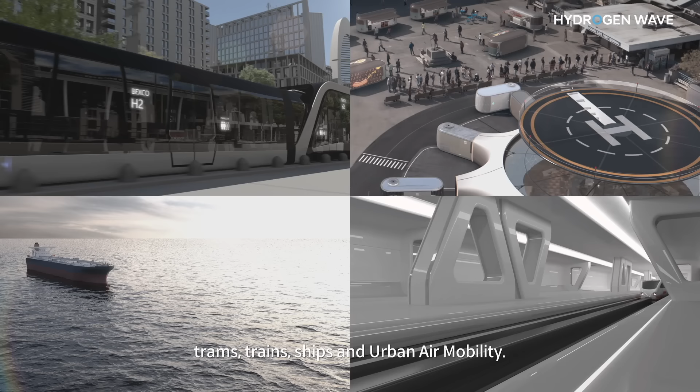Then, what does Hyundai Motor Group's vision for future hydrogen society look like? Our vision covers not only passenger and commercial vehicles, but also various types of transportation, such as trams, trains, ships, and urban air mobility. Our vision is to apply hydrogen energy in all areas of life and industry, such as our homes, workplaces, and factories.

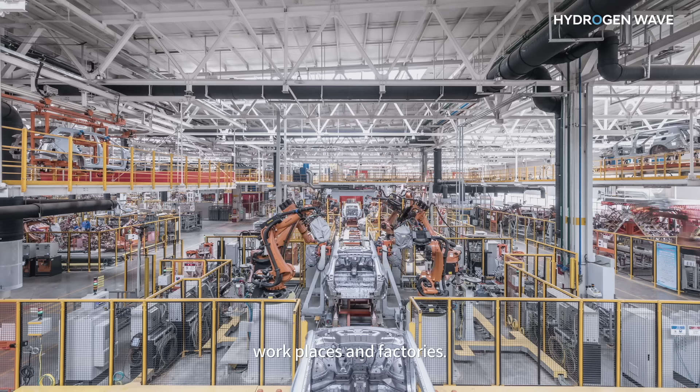The goal is to make hydrogen readily used for everyone, everything, and everywhere. With this breakthrough, we aim to help foster a worldwide hydrogen society by 2040. In particular, we will proactively respond to climate change through our hydrogen solutions, starting with the commercial vehicles sector, which emits relatively large amounts of CO2.

Going forward, Hyundai Motor Group will launch all our new commercial vehicles, such as buses and heavy-duty trucks, as hydrogen EVs and battery EVs in the global market. By 2028, we plan to become the first global automaker to apply fuel cell systems to all commercial vehicle models.

Using these hydrogen commercial vehicles, we will promote the complete transition of Korea's public transportation and logistics systems to hydrogen-based solutions. This will be a good model to follow for countries around the world. To achieve this, we are planning to introduce a new fuel cell system in the near future at a reduced price and volume with significantly improved durability and output.

We are confident that with our vision and technological innovation, there will be great changes in human life comparable to the Industrial Revolution and Digital Revolution.

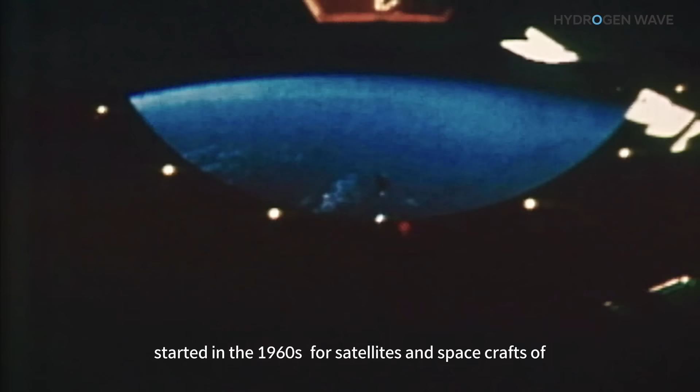When did the hydrogen fuel cell start its career? The first remarkable application of hydrogen fuel cells started in the 1960s for satellites and spacecraft of the Gemini and Apollo programs. We expected that bringing hydrogen fuel cells to the public would not be easy.

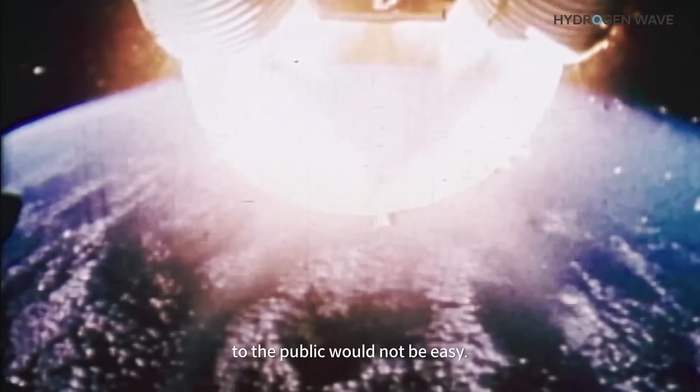Nonetheless, Hyundai Motor Group anticipated the future potential of hydrogen fuel cell at an early stage. In 1998, Hyundai started to develop a hydrogen fuel cell car and has made continuous efforts to make significant progress to the present day. In February 2013, Tucson FCEV was released for the first time in the world, opening the door to the mass production of fuel cell EVs.

Then, in 2018, Hyundai released the next generation hydrogen fuel cell SUV, Nexo. Our Nexo is ranked as the FCEV with the most sales worldwide. But we didn't stop there. We plan to use our fuel cell EVs in various fields.

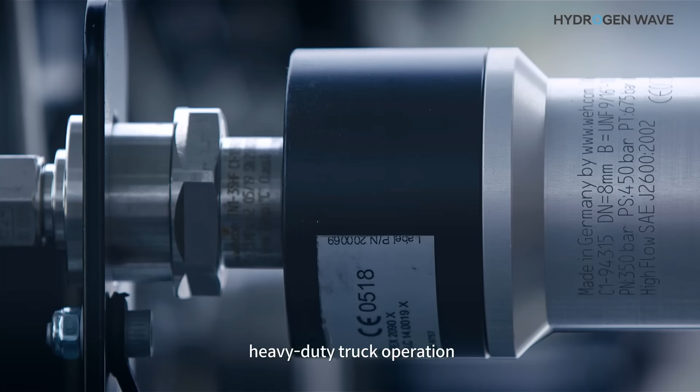First is the key to logistics: trucks. The big challenges in long-haul, zero-emission, heavy-duty truck operation is refueling time and range. The zero-emission powertrain of our Xcient fuel cell truck consists of two Nexo fuel cell systems, a hybrid high-voltage battery for energy recuperation, and a powerful electric motor.

Our Hyundai Xcient fuel cell truck is the first mass-produced heavy-duty fuel cell truck in the world and started operating in Switzerland last summer.

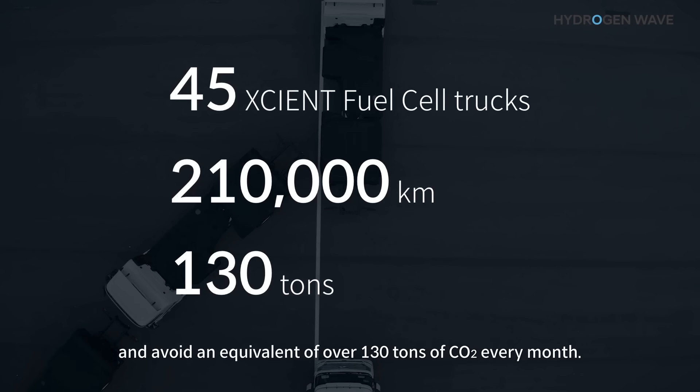Our fleet keeps growing, and we currently have 45 Xcient fuel cell trucks on the road. They cover over 210,000 kilometers of zero-emission operations each month and avoid an equivalent of over 130 tons of CO2 every month. We are remotely monitoring each of our Xcient fuel cell trucks like a Le Mans race car, using our latest smart vehicle monitoring technology.

And so far, my engineers are very satisfied with the performance, the efficiency, and reliability. From the start, Xcient has also met customer expectations, even in challenging aspects such as refueling time and range. Let's hear from the logistics company and the driver in Switzerland about their experience with the Xcient fuel cell truck.

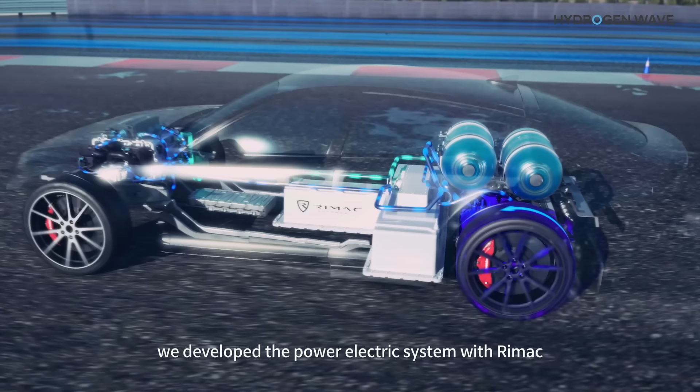So we decided to collaborate with Rimac Automobili, in which Hyundai Motor Group invested in 2019. For this Vision FK prototype, we developed the power electric system with Rimac, while our high-performance and fuel cell engineers developed all other systems of the Vision FK prototype.

Here's another use case for hydrogen. Production, storage, and transportation convenience are important for the widespread use of the hydrogen fuel cell as an energy converter and power generator.

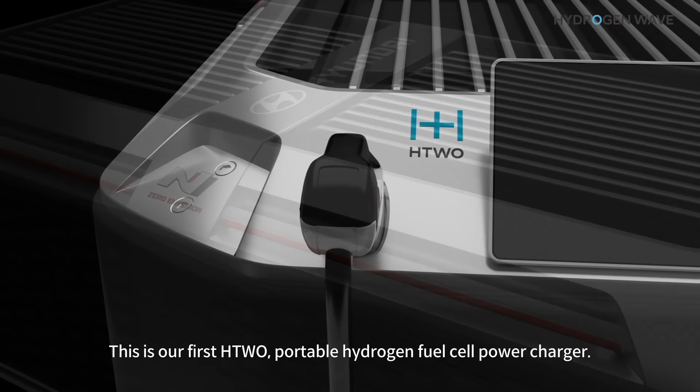This is our first HTWO portable hydrogen fuel cell power charger. This powerful zero-emission charger was developed to charge high-performance electric race cars that are participating in electric touring car racing, the ETCR.

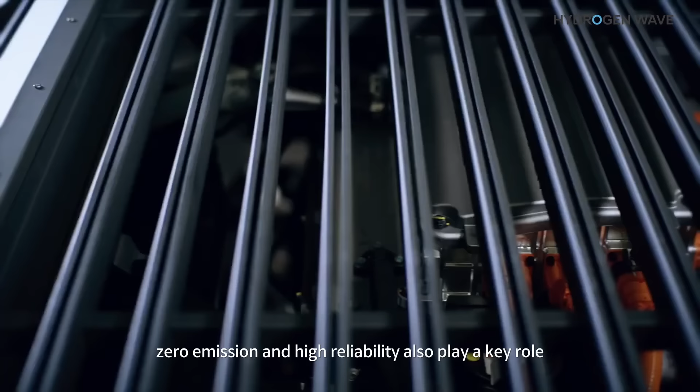Infrastructure and temperature independency, immediate and dynamic power generation, zero emission, and high reliability also play a key role in producing emergency electricity at remote and sensitive locations where a power supply is difficult.

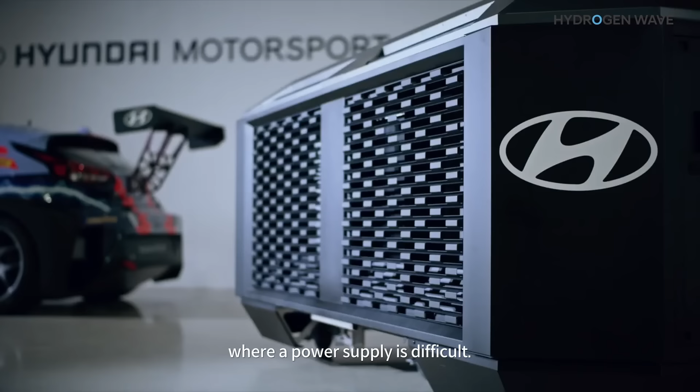Hyundai's hydrogen fuel cell technology is not limited to vehicles. This is an eco-friendly tram that uses hydrogen fuel cells. There is also a rescue drone that can extinguish fires and save lives.

The eco-friendly hydrogen fuel cell has vast potential for use in several next-generation forms of mobility, such as trams and UAMs. Hyundai plans to develop hydrogen fuel cells so that they can be applied to various mobility devices beyond passenger and commercial vehicles. Now, shall we look at the next generation of fuel cell system technology that Hyundai Motor Group is developing? Sehun, please, now it's your turn.

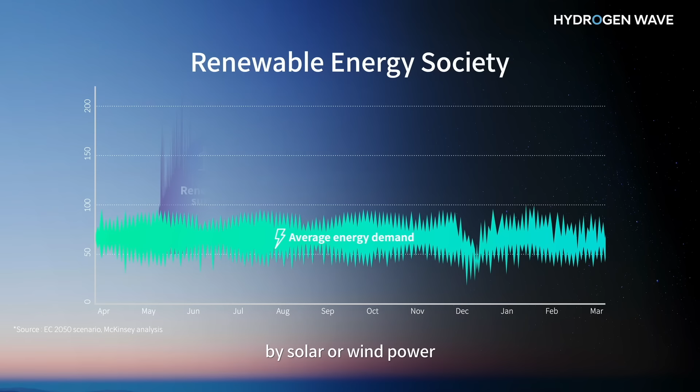My good old Japanese friend, Professor Hirose, once told me that nomads preserve milk as cheese left over from the summer and use it as a milk substitute during winter. When a renewable energy society is established, hydrogen will play a similar role to cheese. Converting excess electricity generated by solar or wind power into hydrogen will be very useful for storing large amounts of energy and transporting it over long distances. So electricity is like milk and hydrogen is like cheese.

See what I mean? Countries around the world are looking to use hydrogen as an energy alternative for a global carbon-neutral society. European countries and the United States have boldly announced visions for hydrogen economies and are supporting infrastructure development in transportation and manufacturing. But many people still wonder about hydrogen technology and are skeptical if it could really be used in everyday life. Today, let me show you that fuel cell is a proven technology that can deliver the benefits of hydrogen to people around the world in various fields.

Basically, a fuel cell is a power generator, like an engine. It differs from a battery, which stores electricity. A fuel cell system consists of a fuel cell stack that generates electricity, a hydrogen supply system, an air supply system, and a thermal management system.

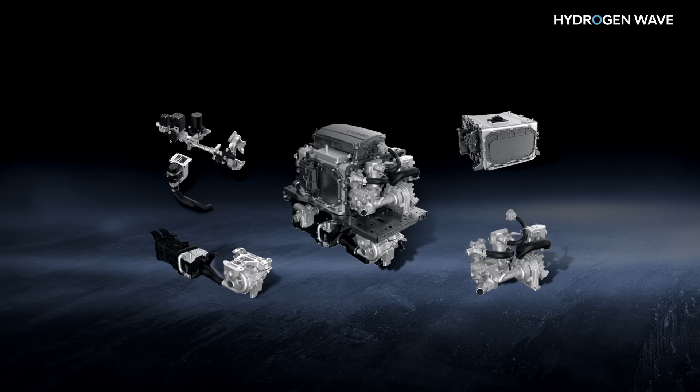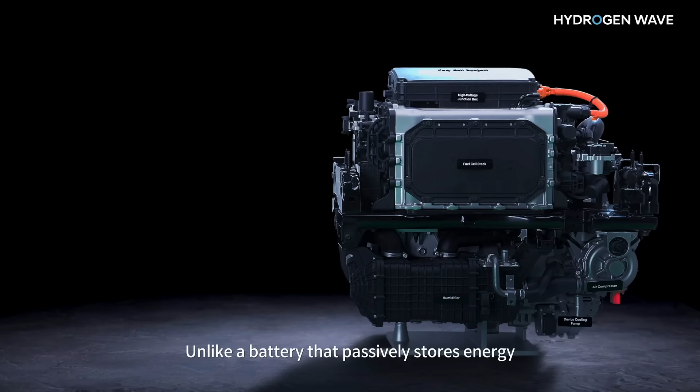It generates power by combining hydrogen and oxygen, similar to the engine of an internal combustion vehicle, but without the carbon emissions. Unlike a battery that passively stores energy, a fuel cell system produces energy through chemical reactions and operates as long as hydrogen fuel is supplied.

The science is simple. A fuel cell is just a reverse reaction of water electrolysis that many of you learned in school. As recently as 15 years ago, many people still had doubts about hydrogen fuel cell technology. Its success depended on miracles in 4 areas: hydrogen production, hydrogen storage, fuel cell technology, and infrastructure. At that time, I fully agreed that resolving these 4 challenges would not be easy.

However, since then, Hyundai Motor Group has undertaken the challenges and hasn't given up. Today, clean hydrogen production is one of the most promising means for successfully achieving the European Green Deal, and gigawatt-scale projects have already been announced.

Recently, the EU and US announced their plans to support the establishment of hydrogen refueling infrastructure. At least for long-haul commercial trucks, there is consensus that hydrogen and fuel cells will offer the best alternative to diesel powertrains. We are now at the point where we can confidently show you our vision for realizing a global hydrogen society. The core competitiveness of fuel cell technology is comprised of cost and durability.

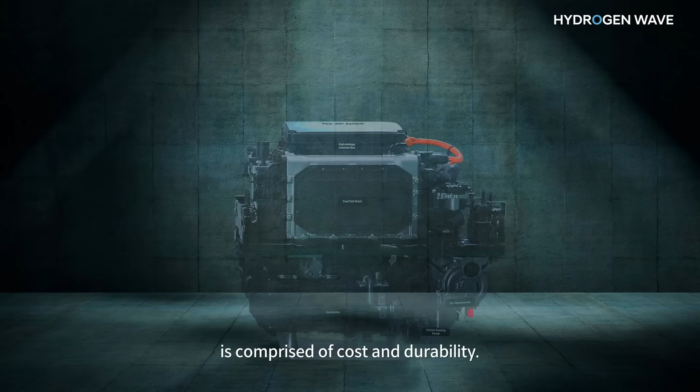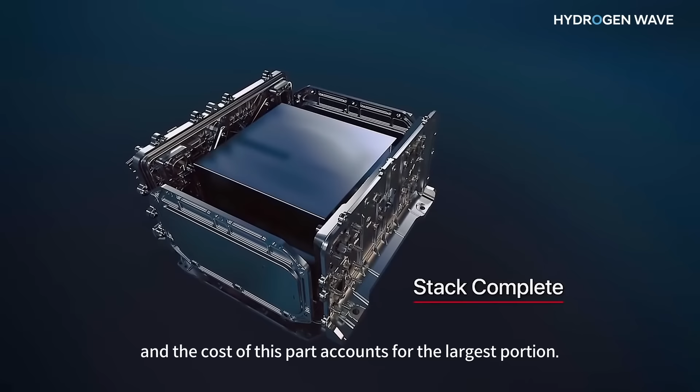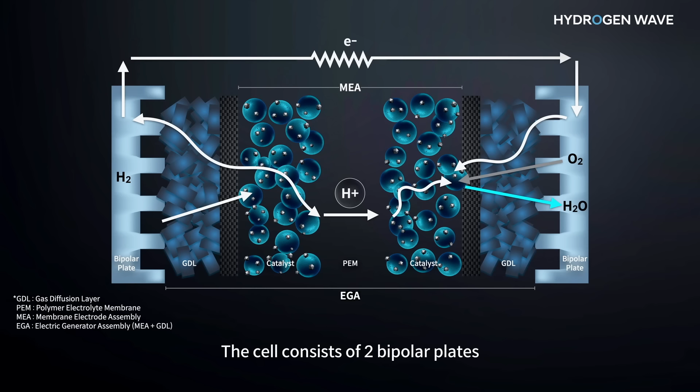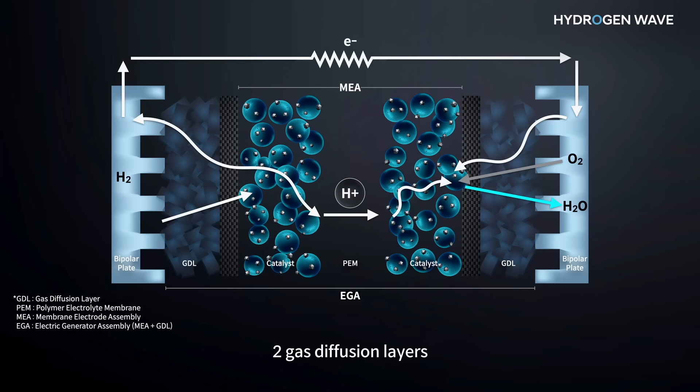The cell consists of 2 bipolar plates, which provide flow channels for hydrogen and oxygen and support the structure of the stack, 2 gas diffusion layers, and a membrane electrode assembly, called MEA. MEA forms the core of a fuel cell and is a key component that generates electricity by causing a chemical reaction between hydrogen and oxygen.

Reducing the cost of these components is key to cost competitiveness. In the case of bipolar plates, we have reduced the price by replacing the graphite materials with stainless steel. There are worries that stainless steel would corrode and would not last long in the acidic fuel cell environment. But after more than 10 years of development, we are successfully using stainless steel, even without special coating, for cathode bipolar plates.

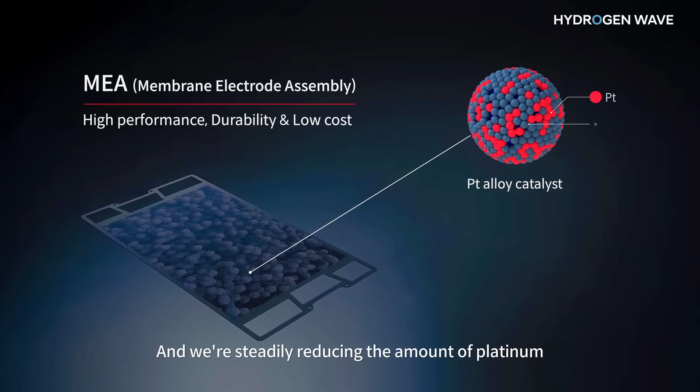I still hear people saying that fuel cells are expensive because they require a large amount of platinum. That was true 10 years ago. But actually, platinum is not the major cost factor now, and we are steadily reducing the amount of platinum used as a catalyst. Let me show you how the cost of the fuel cell system has decreased.

In the past, the cost of a fuel cell vehicle was extremely expensive and was notoriously called a million-dollar car. For example, the cost of a fuel cell system applied to a prototype vehicle in early 2003 was triple the price of my house in Seoul.

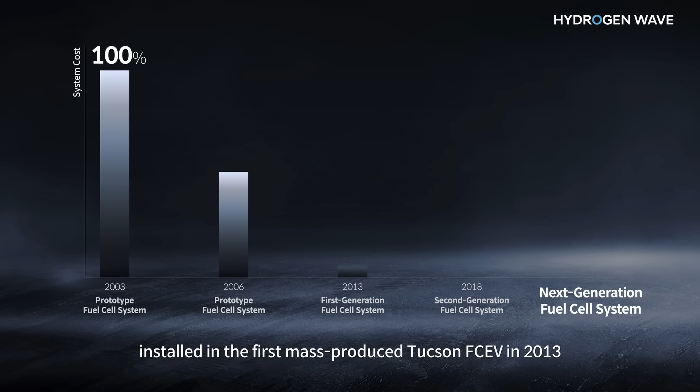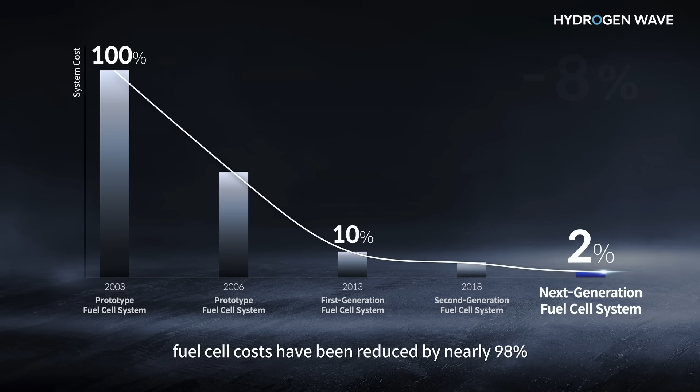However, in 2006, the cost was reduced by half. The cost of the first-generation fuel cell system installed in the first mass-produced Tucson FCEV in 2013 was reduced to about 10% of the first model developed 10 years before. As you can see in the graph, fuel cell costs have been reduced by nearly 98% over the past two decades.

However, the fuel cell vehicle market is still at the early stage of development. Only 10 to 15,000 fuel cell vehicles are produced per year, and we are not yet benefiting from economies of scale. In comparison, there are 4 to 5 million EVs and nearly 100 million ICE vehicles produced per year. So we still have work to do.

Our goal is to achieve cost competitiveness comparable to that of EV batteries by 2030. I also want to point out that durability improvements are progressing at a fast pace. Durability of a fuel cell system depends on various chemical conditions, which makes durability more difficult to ensure.

During 2004 and 2009, the US Department of Energy launched a fuel cell vehicle demonstration project in order to verify the durability of fuel cell cars. The average durability of the fuel cell stacks at that time was only 821 hours, which is only 1.5 years of durability. This was another reason why people doubted that fuel cell technology could be commercialized.

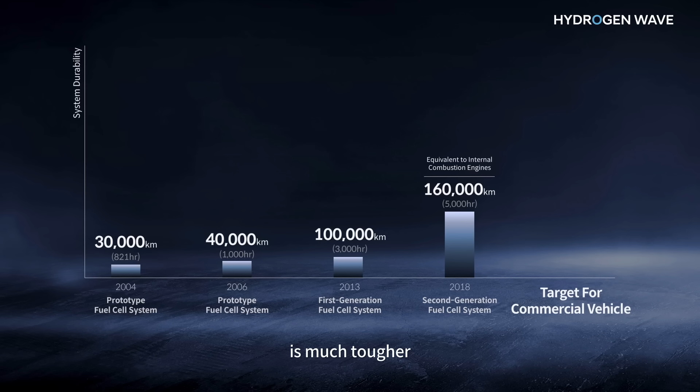Today, the industry standard of durability is 5,000 hours, which corresponds to a 10-year life cycle of passenger cars. For commercial vehicles, the durability requirement is much tougher, from 500,000 to 1 million kilometers. I'm sure this requirement can be achieved in the near future by using better materials engineering and operation technologies. We are focused on achieving cost reduction and improving durability throughout our development activities.

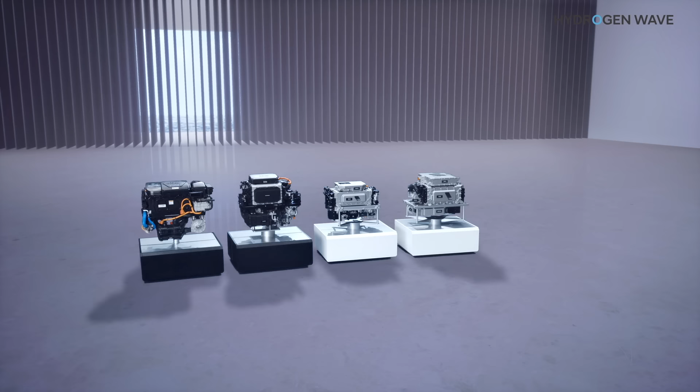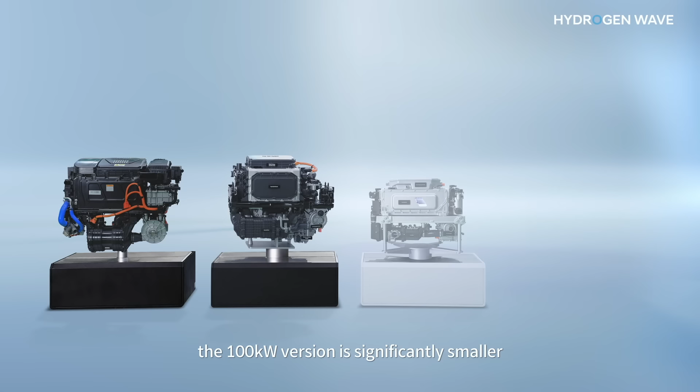Today, I'm going to share details about the next generation fuel cell system that Hyundai Motor Group will launch in the near future. It's a third generation system under development to succeed Nexo's current system. The one on the left is the 100 kilowatt class system, and the one on the right is a 200 kilowatt class system. Compared to Nexo's system, the 100 kilowatt version is significantly smaller, as we reduced its volume by 30%, which ultimately improves vehicle packaging.

Compared to Nexo's system, the 200 kilowatt version is almost the same size, but twice the output. This version was developed for commercial trucks. By using 2 systems per truck, we can provide around 400 kilowatts, which is equivalent to the power of current diesel engines. We have arranged the first and second generation systems here for your reference.

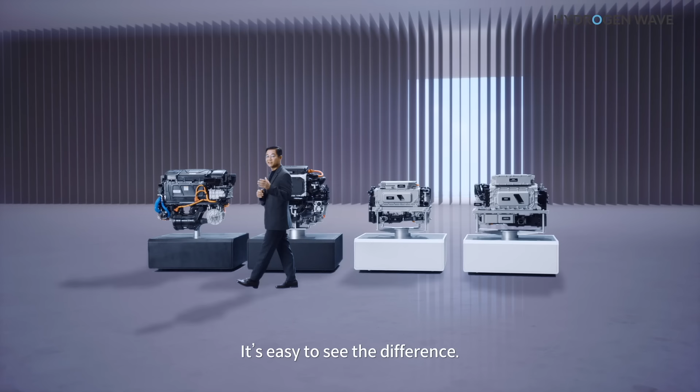It is easy to see the difference. In 2013, it was about this size. We had difficulty putting this system in the vehicle, as you can imagine. But the system applied to Nexo in 2018 was reduced in size like this. The third generation system to be applied in 2023 is this size.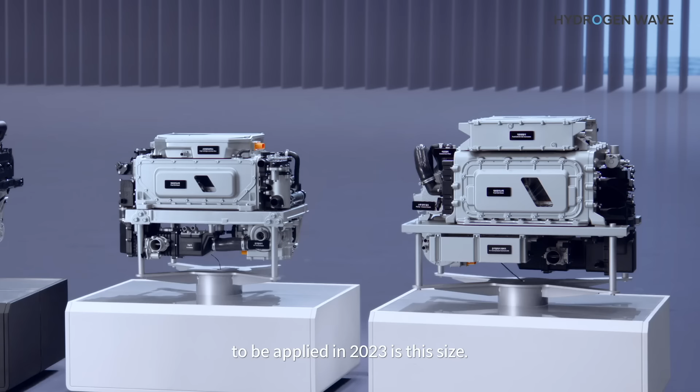It's still in the prototype stage. So by the time it goes into mass production, you will see a system with a much more refined level of completion. The fuel cell power module

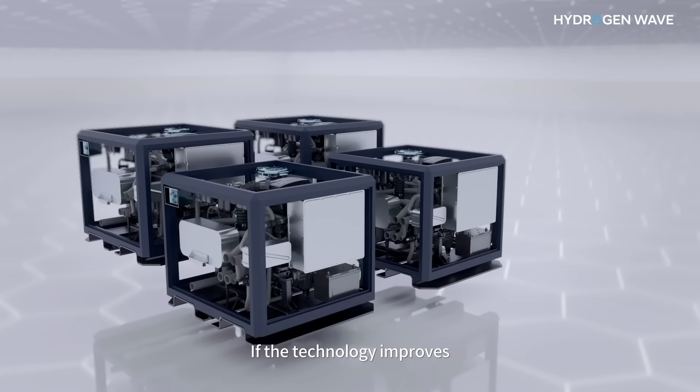is a system that's being promoted for the development of megawatt scale power generation systems. It is possible to provide various outputs, such as 500 kilowatts and 1 megawatt, by expanding several 100 kilowatt unit modular systems. If the technology improves, it can be assembled like Lego blocks to produce high-capacity output. Just imagine the possibilities.

Some people say that replacing conventional power systems with fuel cells is easy, but they are wrong. Other people say it's impossible, but they are also wrong. It's very challenging, demanding us to exert unprecedented efforts, but we are confident that it's possible. And we, Hyundai, will pave the way for the global hydrogen economy with our fuel cells powered by HTWO. Thank you for your interest and support.

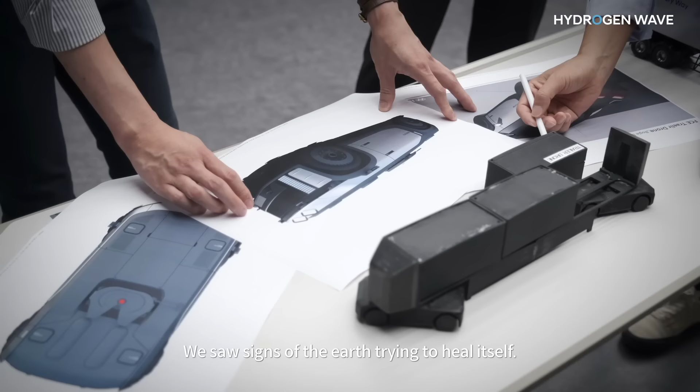So at Hyundai, we went back to the drawing board to think back from the basics. We had to think differently. We knew we had the tools. Let me take you back about 10 years. Do you remember when the smartphone was introduced to the public? It was a perfect storm of new technology that resulted in the creation of a completely new value chain.

What used to be just a phone is now a highly emotional product with great design, immaculate sound quality, and endless media you can stream on the go. A completely new value chain has emerged around it. Do you remember the word telephone? When was the last time you used that word?

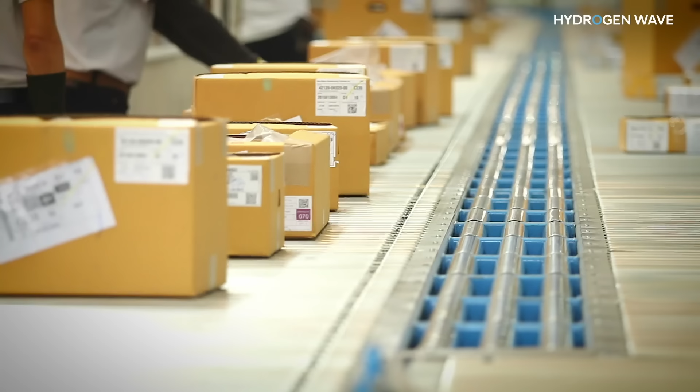At Hyundai, mobility isn't limited to people. We do cargo. Incredible volumes of cargo are transported in trailers, trains, and ships. This sounds like a distant industry, but it is actually closer than you may think. That package you order, the brand new car you were waiting for, they are transported to your front door through a seamless worldwide logistics system.

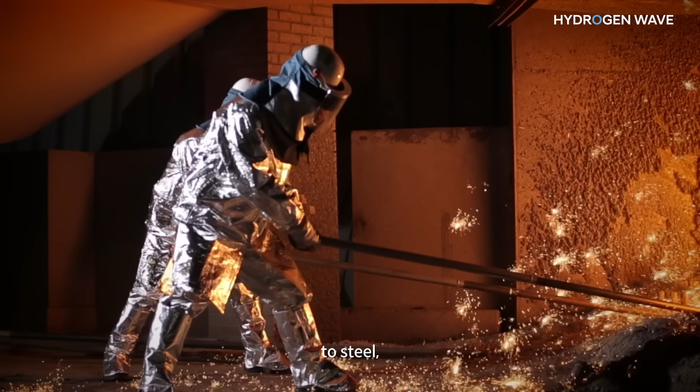Due to COVID-19, this system was crippled by inefficiencies last year. It also shed light on the much-needed updates to an archaic logistics system. Hyundai is well-positioned to lead this change with a broad business portfolio, from automobile to steel, construction, and trains. We are ideally equipped to deploy and rapidly scale innovative technologies.

We have been researching for some time now. Back in 2019, we introduced our vision of a hydrogen fuel cell commercial vehicle with the Neptune concept. At CES 2020, we presented the purpose-built vehicle, pushing the boundaries of what is possible when systems go fully autonomous. This blank design slate is a never-before-experienced dream opportunity, and we put everything we learned in the last few years into this project. The culmination of that effort is the fuel cell e-bogie.

Creating the e-bogie wasn't as easy as putting one and one together. The requirements of the commercial vehicle were significantly different from that of passenger cars. Who knew? So we had to think completely differently and consider the modularity needed to cover a vast network of the value chain.

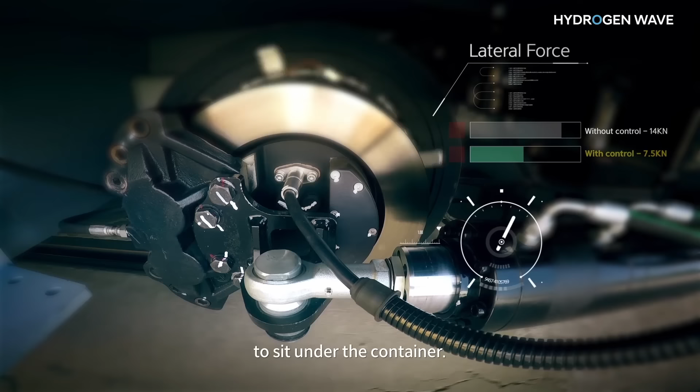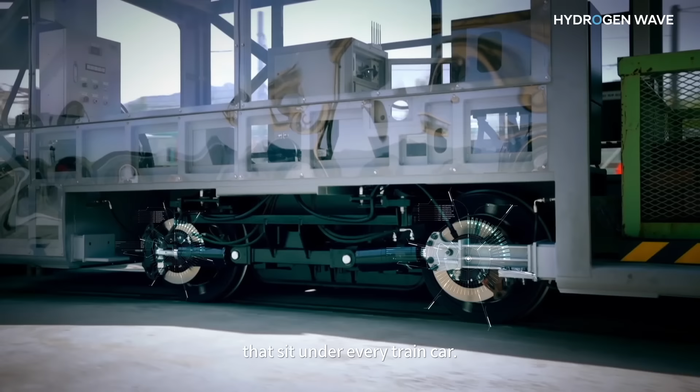Devoid of passengers, we could encase the entire fuel cell system in a dedicated chassis with a fully autonomous system. A steering system could be placed at both the front and rear. What does this do? It enables sideways movement. Lastly, the intelligent package resulted in the entire system being compact enough to sit under the container. Hence the term bogie, which originates from the rail industry. Rail bogies are wheeled frames that sit under every train car. The e-bogie really is more like a smart robot than a traditional car, just like the smartphone revolution.

The fuel cell e-bogie is a platform that offers limitless business applications. Large and heavy containers are limited by their size and the space they require to move. But with two e-bogies in a double bogie configuration under a container, they can articulate movement from beneath. It helps them minimize the turning radius or slide sideways into a tight spot.

Logistical efficiency is further enhanced by cluster mode. This allows multiple trailer drones or e-bogies to travel together in unison. In what is an almost train-like configuration, it is a true multi-purpose platform that can be adapted to an even wider value chain: container transportation, portside logistics, airport operation, construction, fire and rescue.